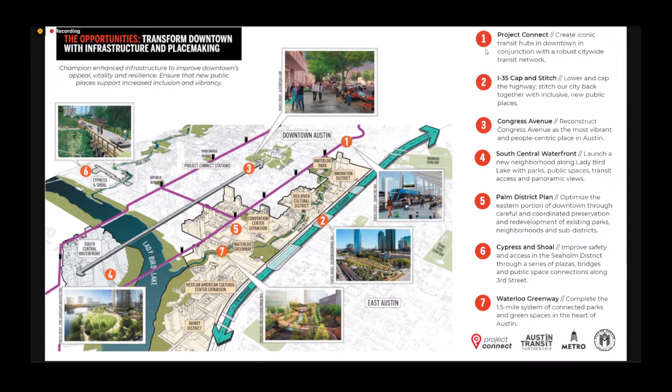Thanks, Melissa. So I mentioned that we were going to do a quick overview about Project Connect. It's important that everybody has the information they need to be able to provide some meaningful feedback today. So we'd like to do a quick run through of why Project Connect, what's it all about.

I don't think it's any secret to any of you out there that our population is exploding in Austin. In fact, it's expected to double by the year 2040. That's a lot of people, and that's a lot of single occupancy vehicles. We need a solution, and Project Connect is that solution to expand our transit system and provide new services to connect Austinites to the places they need to go. Next slide, please.

So one of the important things that happened to set the stage for Project Connect was that our partners at the City of Austin approved a strategic mobility plan in 2019. And that plan sets a goal for having a 50-50 mode split between people taking bike, transit, or other non-drive-alone modes to work, versus everything else.

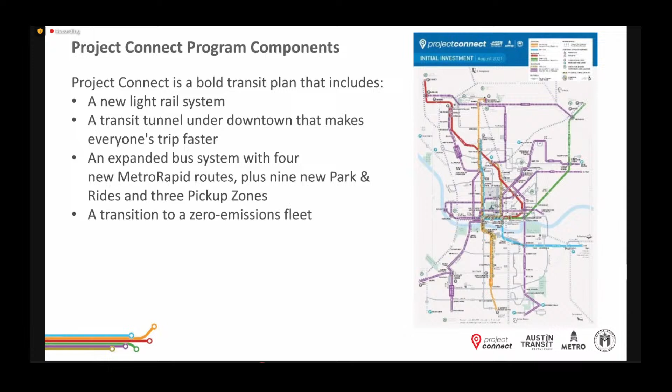And then finally, but most importantly, a transition to a zero emissions fleet so that we are no longer contributing to the carbon footprint of our city, but actually improving your environmental quality. Next slide, please.

So the three values that reflect the community and Project Connect: opportunity and equity. In other words, Project Connect will help create thousands of good local jobs, provide access to healthcare, education, employment, entertainment, and essential services. It's also going to create and maintain more affordable places to live. This is designed to help us move forward to a future without limits.

Environment and sustainability: there's a shared passion in our community for the environment, and that's why a commitment to environmental and sustainable practices are core to Project Connect, including that zero emissions fleet. We lean into the challenge to conserve and protect natural resources in the decisions we will make. And then finally, innovation and technology. Technology and innovation inspire much of who we are as a region, and Project Connect will embrace that spirit, making transportation smarter, more efficient, more enjoyable, and easier to use.

Next slide. So what are we discussing today? Today, we're going to be talking about options for the right-of-way along 4th Street, one of the key downtown and transfer stations in the new Project Connect system.

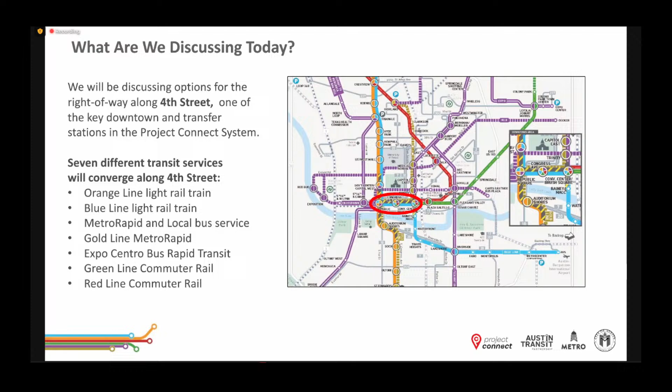Seven different transit services will converge along 4th Street: the Orange Line, the Blue Line light rail service that will run from the airport into downtown, the Metro Rapid and local bus services, the Gold Line Metro Rapid, the Expo Centro bus rapid transit, Green Line commuter rail, and the Red Line commuter rail. So this will become a major transit hub.

We often get the question, and it's valid, how will your feedback be incorporated? The answer is we are in the phase of the draft environmental impact statement, moving from 15% design into 30% design. This is a critical phase in the development of the program, and your input that we get today will inform this next phase.

We want to encourage you all to stay involved beyond this meeting. This is actually an extension of our working groups that were established back in the spring, and this one is a meeting of the Project Connect Downtown Working Group. As part of this group, you will volunteer with your neighbors to meet the project team, give feedback, and help the design team understand how Project Connect can best serve our community.

Your feedback will be used throughout the process of the environmental study and project development. If you're not signed up already, we encourage you to do so at projectconnect.com/getinvolved to sign up for a working group. You can sign up for one or as many as you'd like. We're happy to have you in any and all of these discussion groups.

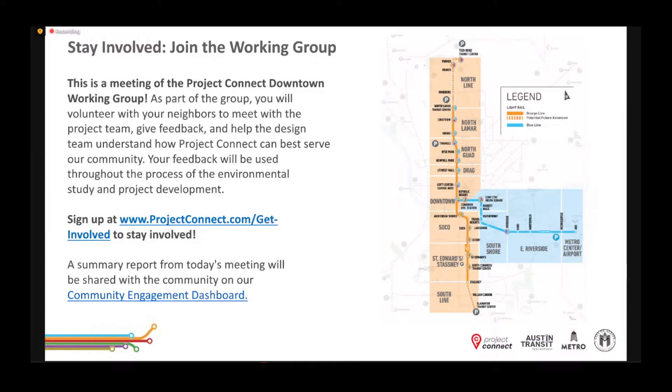And now I'm going to hand it over to my colleague, Peter Mullan, who will talk about the 4th Street Downtown Transit Hub. Thank you, Jackie. Really excited about this part of the program and this part of the system. I think it embodies our goal of taking a human-centric approach towards transit, using this new transit investment to improve our lives on a whole bunch of fronts and reimagine elements of the public realm where we can.

So this is a map of the alignment downtown. You can see there are 3 stations organized around 4th Street: Republic Square Station on the west at Republic Square, Congress Avenue Station in the middle, and then the new Convention Center Brush Square Station. And then to the south, just south of Cesar Chavez, we have the Rainey Street Station.

Those stations are connected by a concourse between the street level and the platform level to facilitate access to the stations and also transfers between the lines that serve those stations. You can see the platforms located in those white boxes along the way.

The Convention Center Brush Square Station is really the current downtown station for the Red Line, but that's also where the new Green Line will come in, with an entrance into the downtown transit hub underground. You can see the Blue Line coming in from the south on the east side, going above ground across the river and then down into the subway once it hits the north side of the lake.

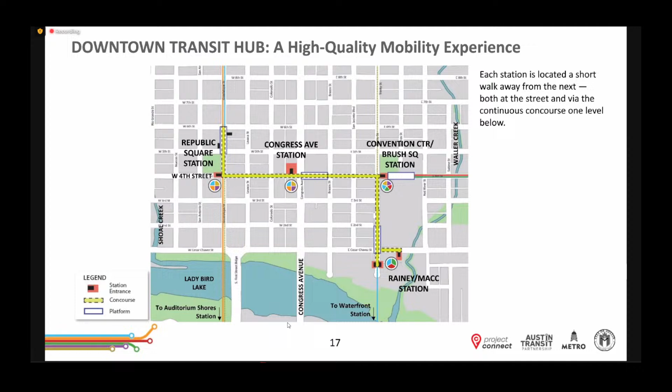So this is a bit of a blow-up, a detail of that system along 4th Street. On the left, you can see the Republic Square Station. The blue boxes are the platforms, and the orange boxes are the entrances into the stations. Even though the platform itself will be located between 5th and 6th Streets, a little on the north side of Republic Square, there will be an entrance directly above the platform, but also an entrance on 4th Street adjacent to Republic Square.

Then we have the Congress Avenue Station, which we really aspire for that to be a real hub. It's at the center of the whole system and kind of the central station for the entire program. And then Convention Center Brush Square Station, which again combines the above-ground station of the Red Line and Green Line with an entrance into the subway to the west.

And then you'll see those smaller orange boxes, those are secondary entrances into the downtown transit hub. We'll show you where those are located as we move forward. So there are these periodic entrances to increase access to the whole system and make the use of the system as seamless and frictionless as possible.

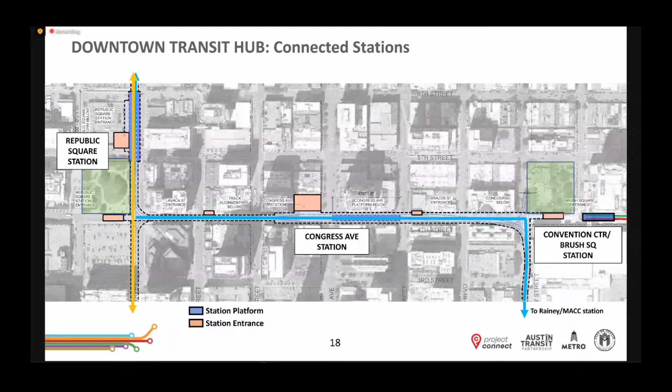So this is a 3-level system. You have the street level up top, and you have the platform level at the bottom, and then the concourse level in the middle. The concourse level really allows easy access from the street to the station, to the platforms, and transfer between trains at these various stations and the various lines that serve these stations.

The other thing the concourse allows us to do is let the platform and the trains do what they need to do. The alignment is very fixed in terms of how the train can move and turn. But the concourse allows us to really design this from the street down. And that's really the focus of our conversation today: as we do this construction project and build this new transit infrastructure, it gives us the opportunity to reimagine the street itself.

We'll have access points to the system at both ends and at various places along 4th Street, but the street itself, we think we have the opportunity to reimagine as something extraordinary for our city.

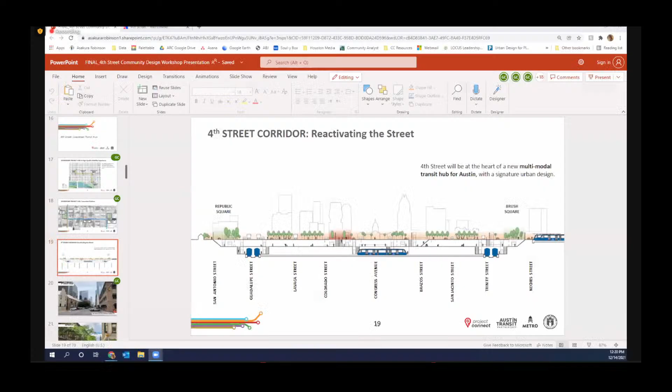So we have this three level system that really enables us to think creatively, innovatively, and aspirationally about what the street itself wants to be.

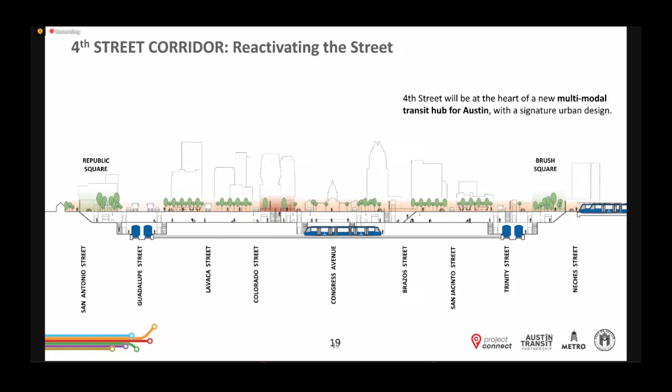So this is 4th Street today. Without offense to anybody, it's a bit of a back street. I think it's not as activated as it could be in terms of being pedestrian friendly and being a destination in our city.

But I think we have the ability to really rethink 4th Street entirely. There are a bunch of new developments coming in addition to this new transit infrastructure. So I think we really have the ability to be intentional about what we want 4th Street to be, and that's where we need your feedback and input, because all of that will pave the way for that future.

Okay, so I'm going to pass it over to Jana McCann and Jim Adams, and they're going to take you through some of the parameters of the history and the context around 4th Street, because I think it's actually pretty interesting.

Thanks, Peter. 4th Street really is unlike any other street in Austin, and certainly in the downtown. One of its characteristics that actually creates an incredible opportunity for it is its short length.

So on this plan, between the two red lines from left to right, that's 4th Street. You can see the green squares it connects on the west side, Republic Square, and on the east side, Brush Square, which also has the newish plaza directly south of it, where one of the new station entries is going to be. Directly east of that is the downtown station, the terminus for the red line.

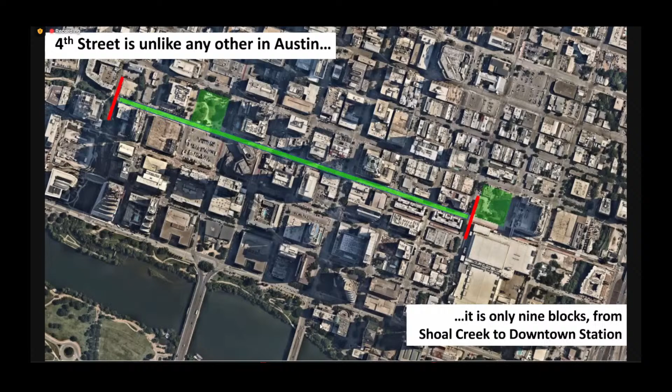Later, those rail lines came in and occupied 3rd, 4th, and 5th Streets, and really started to create a network that was used primarily by freight railroad. That lower part of the city really became used for warehousing and more industrial uses.

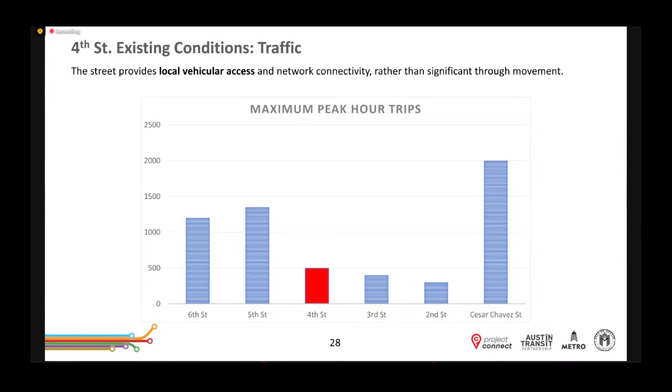In terms of bus movements, it's important to note Republic Square is an important downtown transit bus hub and will continue to be with Project Connect. You can see with those lines, there are major bus routes that will continue to run up and down Guadalupe and Lavaca streets and circulate around Republic Square. So the block of 4th Street between Guadalupe and Lavaca will continue to have bus movements on it.

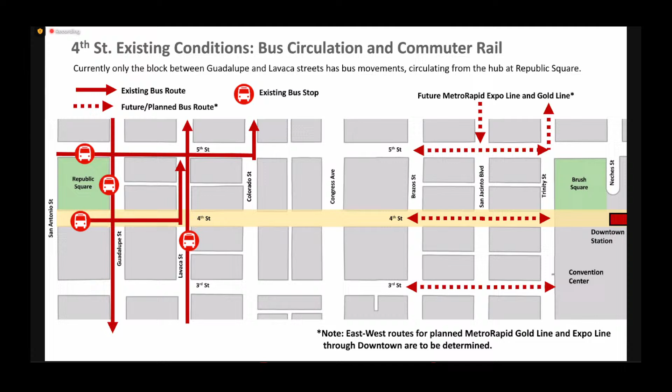Peter mentioned the Metro Rapid lines, the Gold Line and the Expo lines, which will come down San Jacinto and Trinity streets. It's not yet known how those lines will cross east-west to Republic Square - it could occur on 4th Street, 3rd Street, or 5th Street. So that's something we need to consider as we think about the future of 4th Street.

There is pretty significant, robust bicycle infrastructure surrounding the site. I think everyone's familiar with the Lance Armstrong Bikeway, which comes east-west one block south on 3rd Street, and then transfers up to 4th Street through the downtown terminal eastward across I-35.

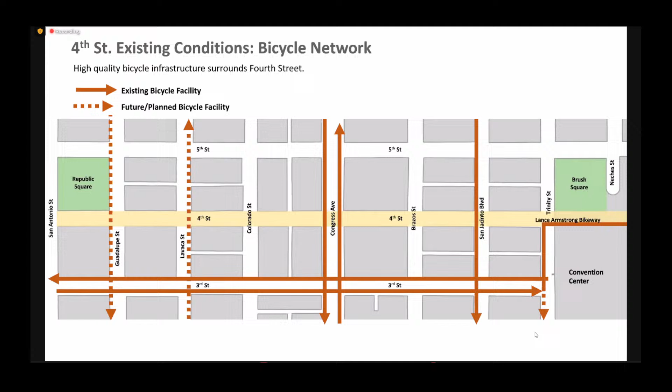Congress Avenue has recently gotten protected bikeways as well, and there are plans to enhance the bikeways on Lavaca and Guadalupe Street. There's also plans to extend a two-way bikeway down Trinity Street that will go all the way to Lady Bird Lake and across the new transit bridge to the south. So lots of really good bicycle infrastructure serving the 4th Street area.

This slide is showing what businesses and developments require vehicular access from the street. We have the drop-off of Hotel Zaza on the west between Guadalupe and Lavaca streets. We have the north-south alleys between Colorado and Congress Avenue, which provide servicing for developments on either side. The Frost Bank Tower has garage access and some service points between Congress and Brazos Street. 301 Congress, south of Frost Tower, has a parking garage access, and the Courtyard Marriott has a drop-off between San Jacinto and Trinity. So those access points have to be maintained.

So there will need to be limited vehicular access along the street, at the minimum.

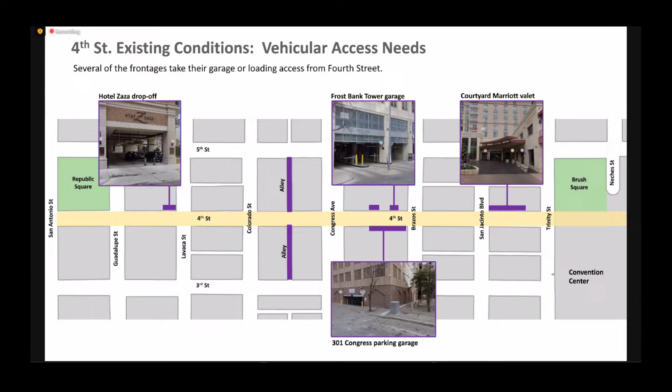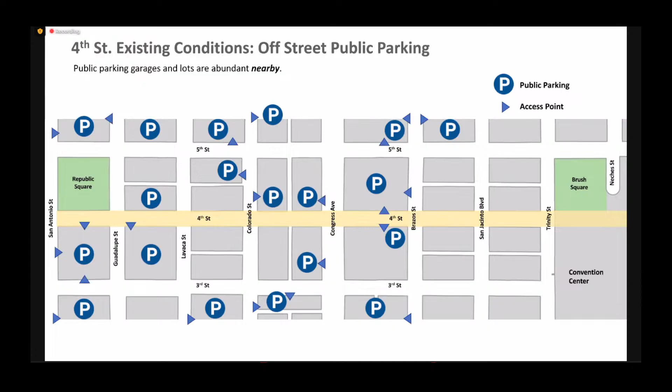Looking at the street and the frontages that exist, we have quite a few frontages with ground-level restaurants and shops. Jana showed us the Halcyon earlier. Hotel Zaza has a restaurant, and Oilcan Harry's is a kind of iconic business on the south side. Some restaurants like Truluck's and others exist along these streets. So we're going to really try to build on those businesses, enhance their opportunities for outdoor seating, and look at how they can help activate the street.

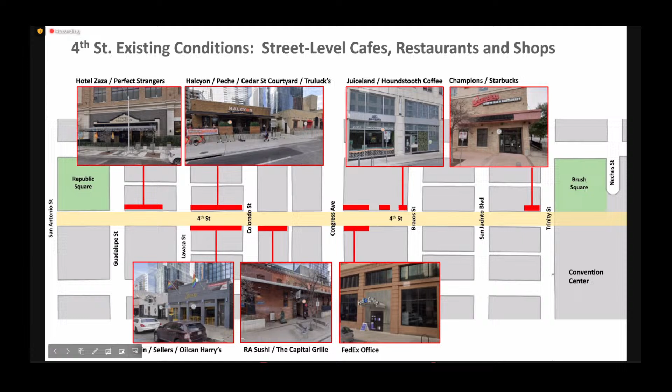It's also interesting to note the number of blocks that are in process of being redeveloped or anticipated to be developed in the near future. The block immediately south of Republic Square is being planned right now. The Hobby Building is expected to go into redevelopment within the next 3 to 5 years. The Railyard Condominiums create two block frontages along 4th Street, so there's real opportunity to transform, along with Brazos Hall redevelopment, that whole two-block stretch leading to Brush Square. And of course the convention center is planned to be completely transformed as well. So there are some great opportunities to really influence the kinds of activities and life that will happen along 4th Street.

Layered on top of that are the improvements of Project Connect itself. Peter mentioned this - every other block will have access to the concourse, either through a major station like we're anticipating at Congress Avenue, the head houses at Republic Square and Brush Square, or the sidewalk-level access points. Each of those will have elevators and stairs, and possibly escalators as well, really creating very efficient direct access down to the subway system.

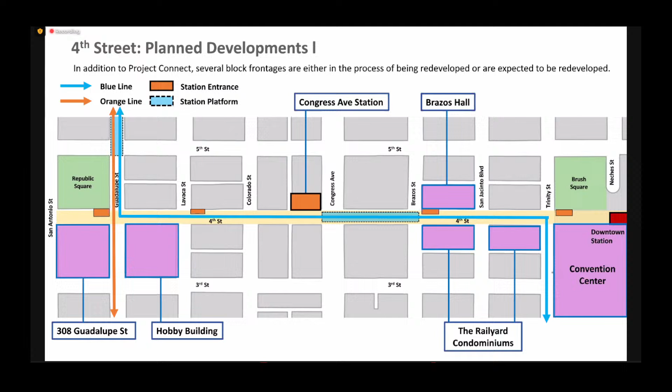Great, thank you, Jim. So now we want to start to look at some of what we see as the opportunities. Jim's already started to telegraph some of them, but we want to flesh them out in a little more detail and get your feedback on them.

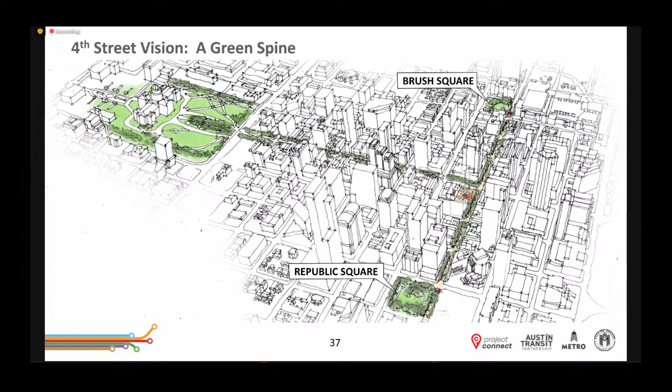This is actually a sketch that Jim made, shared back in the summer, but I think it's kind of a North Star for us, summarizing the opportunity here - how can we use 4th Street as this new green spine that's pedestrian focused, that connects Brush Square and Republic Square, reinforces the importance of those historic squares, and ties the whole city together. We think that opportunity still exists, and access to transit means it will be supremely accessible to people from all over the city.

I'm really glad Jim pointed out that all of these entrances to the transit system below grade will have stairs, elevators, and escalators. So accessibility, for people of all mobility abilities, guides all of our work throughout the program, but certainly here in particular, given that we do have a vertical change to make. If we design for people of all abilities, then we're designing for everybody. And I think that's true for the street as well, right? How do we make the street as accessible and universally designed as possible?

Whenever we approach one of these design problems, we look for key parameters or key goals that we're designing around. For 4th Street itself, we have focused on four. The first is ease of travel and accessibility. This is both for transit of various modes, rail and bus, as well as alternate transportation, cycling and walking, of course. How do we make that as seamless and easy and comfortable as possible?

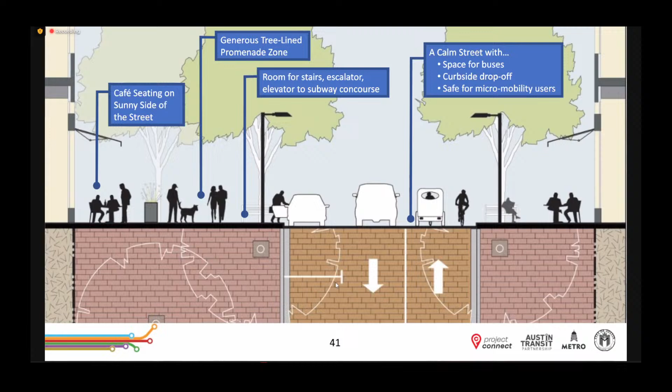So this is, again, looking at 4th Street from Republic Square to Brush Square, the idea of taking this pedestrian dominant great street configuration as a starting point and then laying it out end to end.

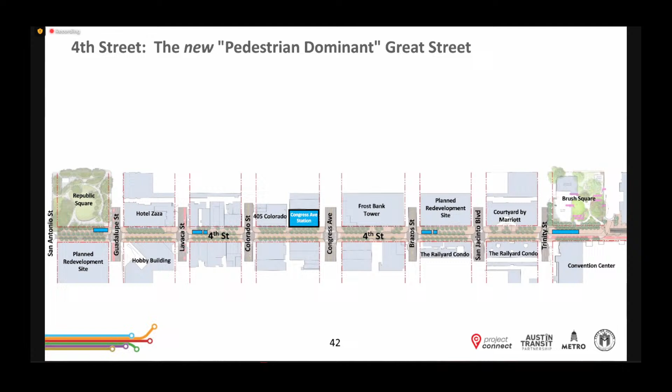New street trees, I think that's a key component to this. So that's what it would look like from end to end, Republic to Brush Square. Next.

It's interesting to note that these two conditions actually go back and forth. That is, every other block there's a station entrance, so that's really creating a powerful level of accessibility and identity for the whole system. Yeah, and elevators at each of those entrances also, so fully accessible too.

Some of you may be asking, why are we talking about the street? Why aren't we talking about the trains, right? The reality is that all of this needs to work together. This is a comprehensive, holistic mobility infrastructure program. I think you can start to see how the vertical circulation and connectivity down to the subway under the street, and then the design of the street, all of that has to be working together.

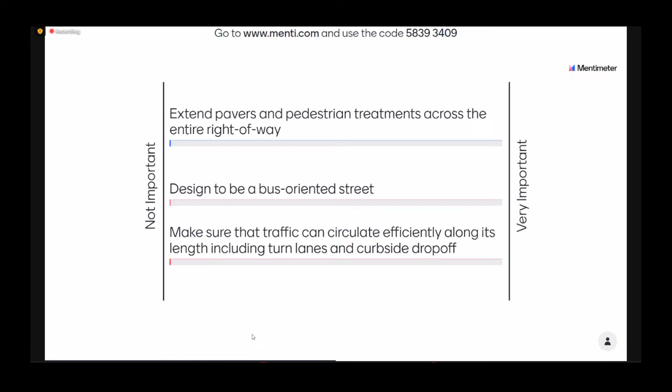Yay, here come the questions. Everyone's smartphone and website browser should have just updated to show the first question. You're ranking each of these options individually, so you don't have to pit them against each other. You just decide how important this option is to you, whether it's not all that important or very important, so we can integrate that into future design iterations of 4th Street. For those with visual impairment participating today, we'll go ahead and read those options for you.

The first one is to extend the pavers and pedestrian street treatments across the entire right-of-way, much like the photo we looked at earlier, where it goes beyond the sidewalk into the street. Then there's designing it as a bus-oriented street, meaning perhaps Metro Rapid would run down the street throughout the day, even with some vehicular access beyond the bus. Then there's making sure traffic can circulate efficiently along its length, including turn lanes and curbside drop-off. Rank those in order of importance from 1 to 5 each. Again, they're not competing with one another, we just want to know how important each option is to you. That'll help with decision making down the road.

We're doing great, we got 76. I feel like we could slide over to the next one. Let's do it. Thank you everyone for your responses. So I'm going to open the next slide.

So again, you're not ranking these against each other. You're just rating them from low to high individually. And I'll take a stab at reading these out loud.